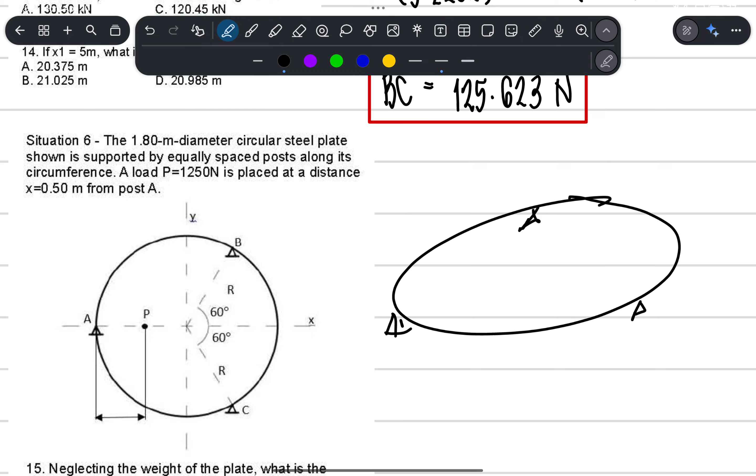Looking at it from the front view, that is the 1.8 diameter. This is 1.8. Then there is a support here, this is RA. Then here is RB. Then here is RC. Then point P is here, at a distance of 0.5 from reference.

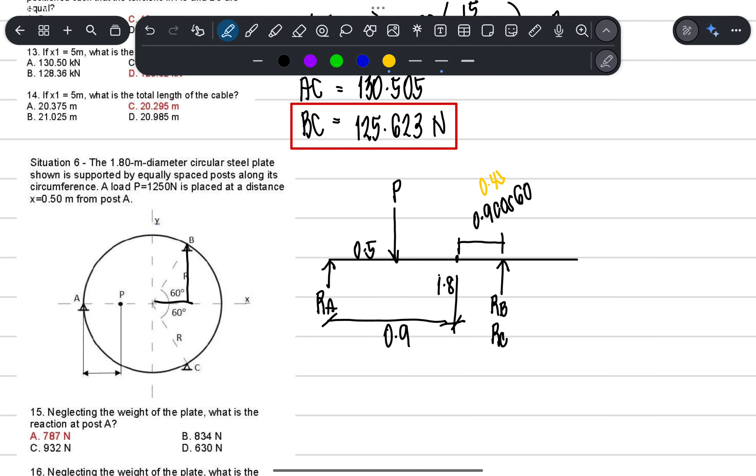What is the reaction at A? We can take moments about the line through B and C so that the reactions at B and C vanish. So, summation of moment at B and C equals 0.

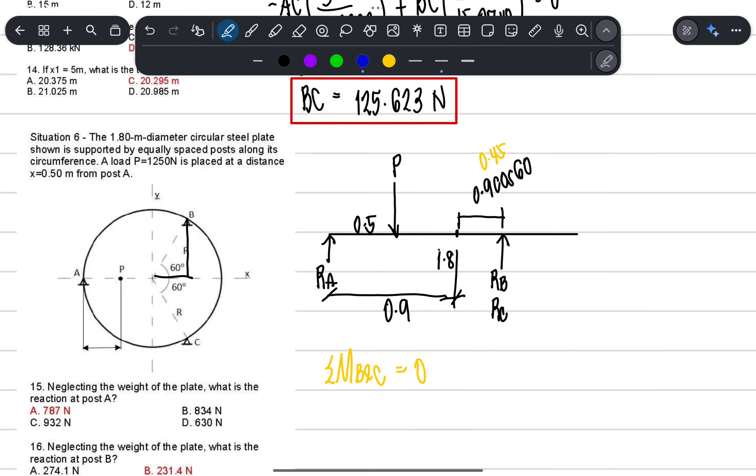That is equal to RA times its moment arm, which is 0.9 plus 0.45, minus P times its moment arm, 0.45 plus 0.4 equals 0. The 0.4 comes from 0.9 minus 0.5.

Substitute the value of P, which is 1250. So, RA equals 1250 multiplied by 0.85, divided by 0.45 plus 0.9, which gives 787.037 Newtons.

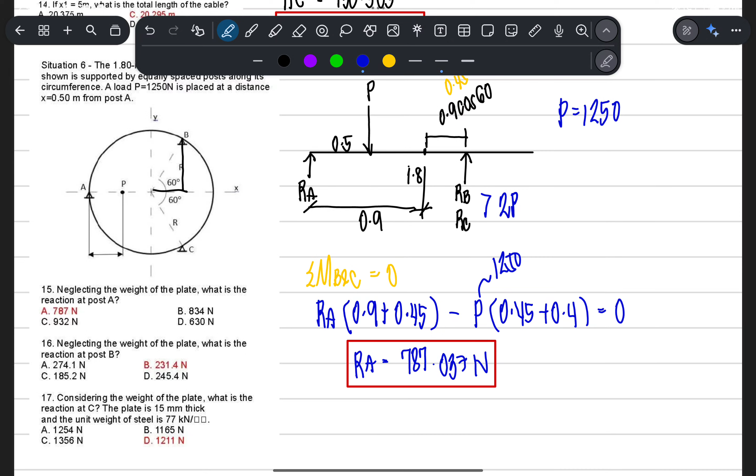Neglecting the weight of the plate, what is the reaction at B? RB and RC are equal since they carry the same load, so we multiply the reaction by 2: 2RB. Using summation of vertical forces, RA plus 2RB equals P, which is 1250.

So, substitute the value of RA: RB equals 1250 minus RA, divided by 2, which gives 231.481 Newtons.

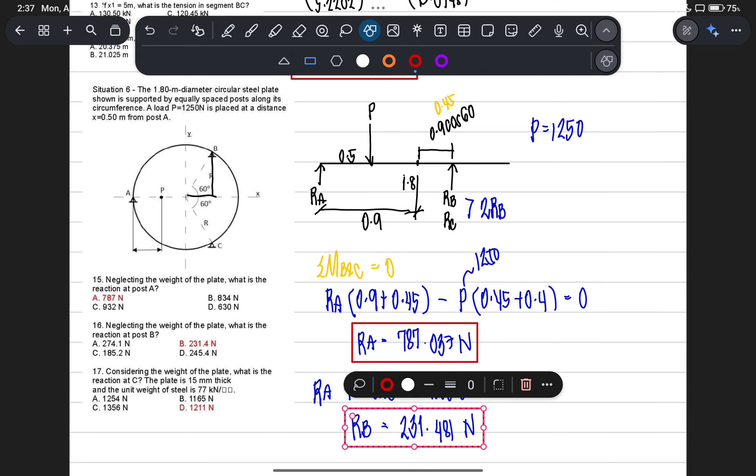Considering the weight of the plate, what is the reaction at C? First, let's get the weight of the plate, since it acts at the center of the plate. This is W.

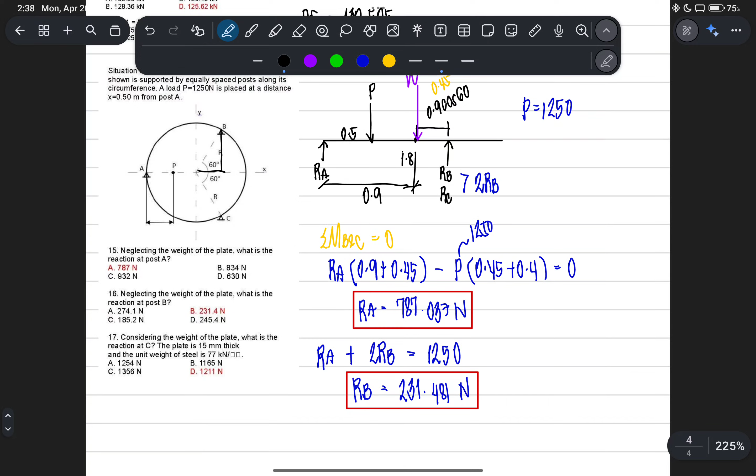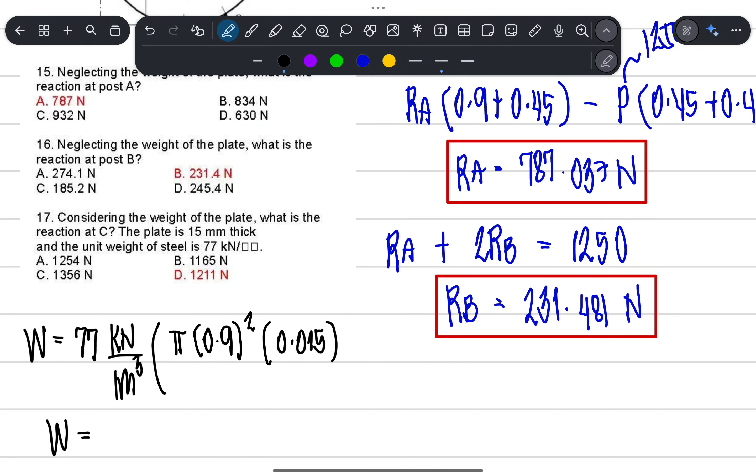The unit weight is 77 kilonewtons per cubic meter, multiplied by the volume of the plate, which is the area, pi r squared, times the thickness. The thickness given is 15 millimeters, or 0.015. So the total weight is 77 times pi times 0.9 squared times 0.015.

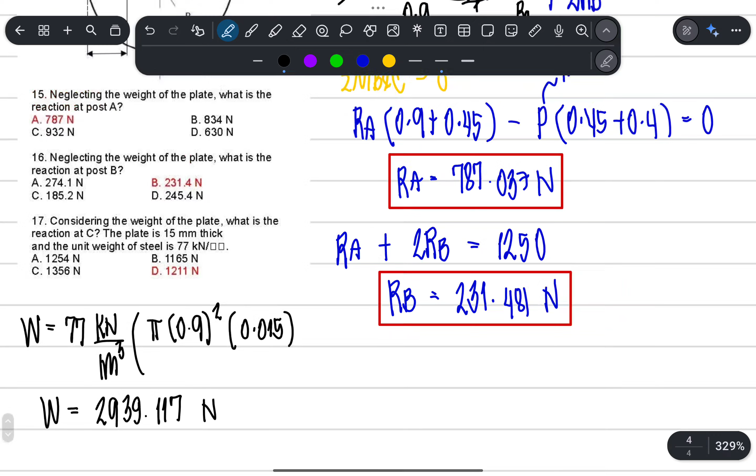To convert to Newtons, multiply by 1000, giving a total weight of 2939.117 Newtons. Then, to solve for RC, we take summation of moment at A equals 0.

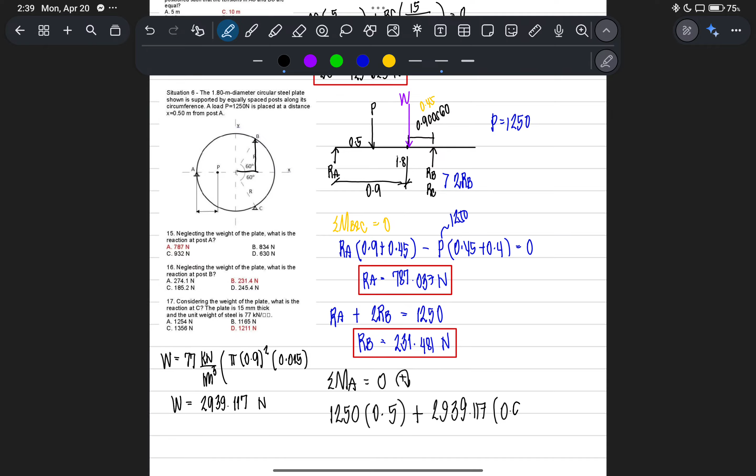Taking clockwise as positive, we have P, which is 1250 Newtons, multiplied by its moment arm of 0.5, plus W, 2939.117 times 0.9, minus 2RC, since there are two of them, with moment arm 0.9 plus 0.45, equals 0.

So, 1250 times 0.5 plus 2939.117 times 0.9, minus 2RC times 0.9 plus 0.45, equals 0. The answer is 1211.187.

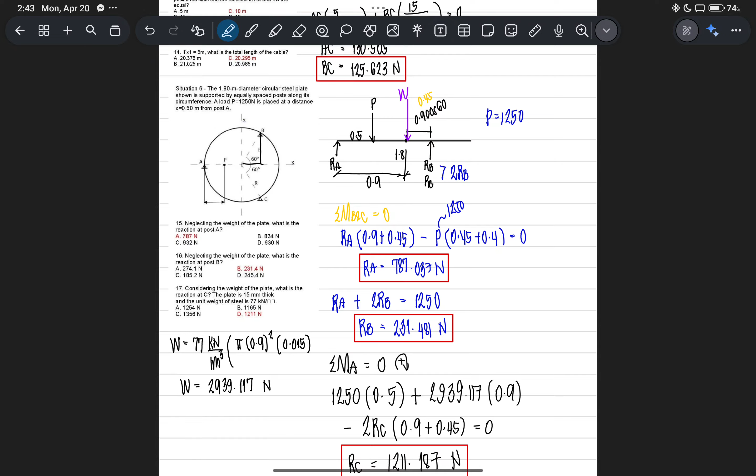Ang gulo. Okay, next, konti na lang, 13 na lang. Yung 13 naman, paulit-ulit naman yung tanong na yan.

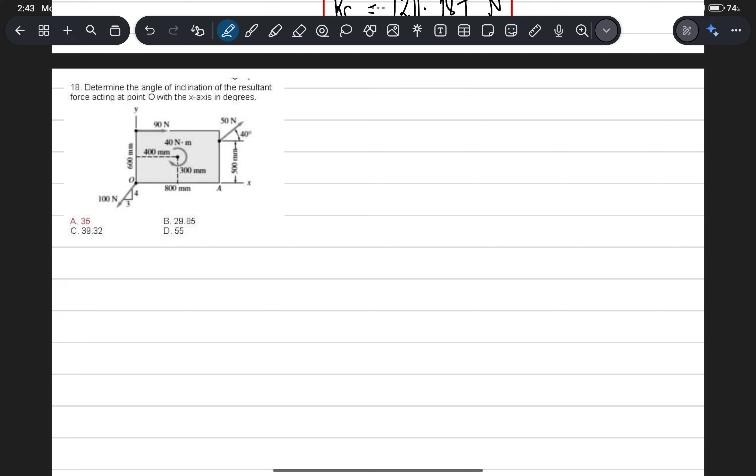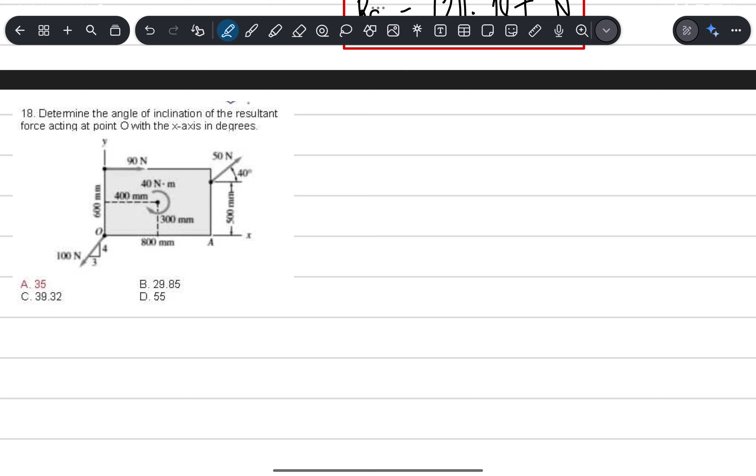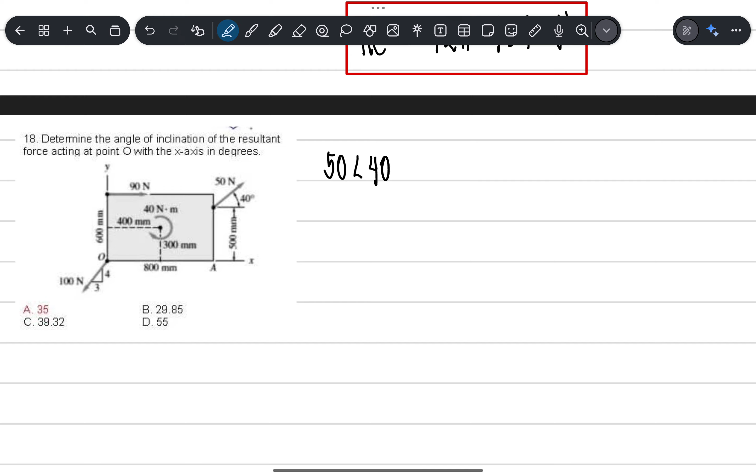Determine the angle of inclination of the resultant of forces acting at O with the reference x-axis. Pakitry nga kung kaya to sa complex mode. So that is equal to, unahin natin si 50 angle 40 plus 90 angle 0 plus 100, and then ang angle natin na gagawin is arctangent, kunin mo natin yung angle nito.

This is theta. Sorry, kunin mo natin theta. So that is arctan of opposite over TOA, 4/3. So magkano yung theta? That is equal to 4/3, which is 53.13. So ang lalagay natin dito is 180 plus 53.13.

So magkano yung R angle theta resultant? Mode 2, complex mode, no? 50 angle 40 plus 90 angle 0 plus 100 angle of 180 plus 53.13.

And then, ups, convert natin. So, that is 83.401 angle negative 35.02. So, ibig sabihin, ang theta natin from the horizontal is...

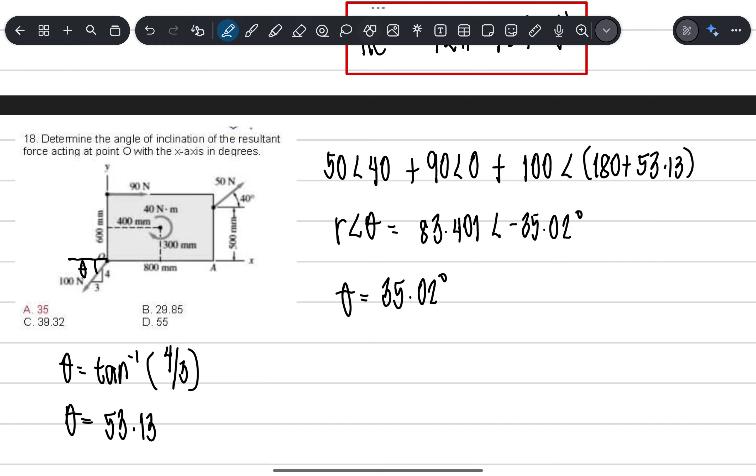Okay, hindi yung kailangan kunin yung ano niyan, yung resultant ng matagal, magmo-moment. Di na magmo-moment dyan, no? Kasi nahanap lang naman is the angle of the resultant. Kasi yung resultant dyan si Rx and Ry. Tapos, ito yung angle theta.

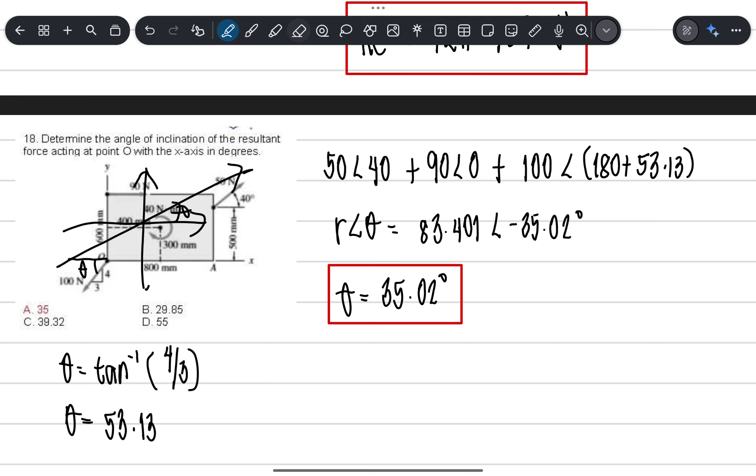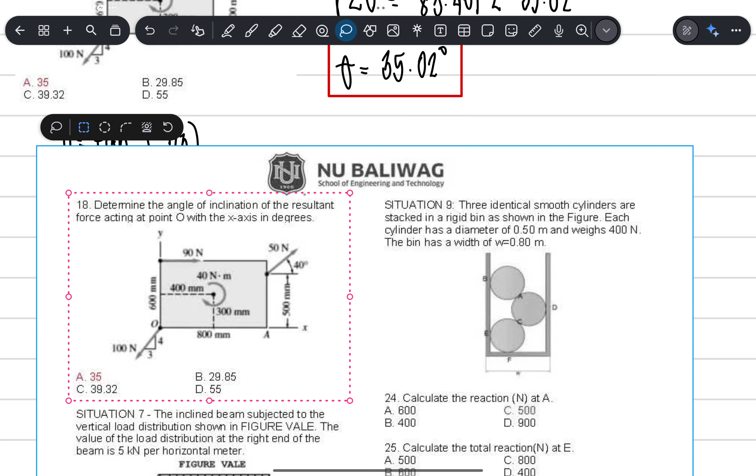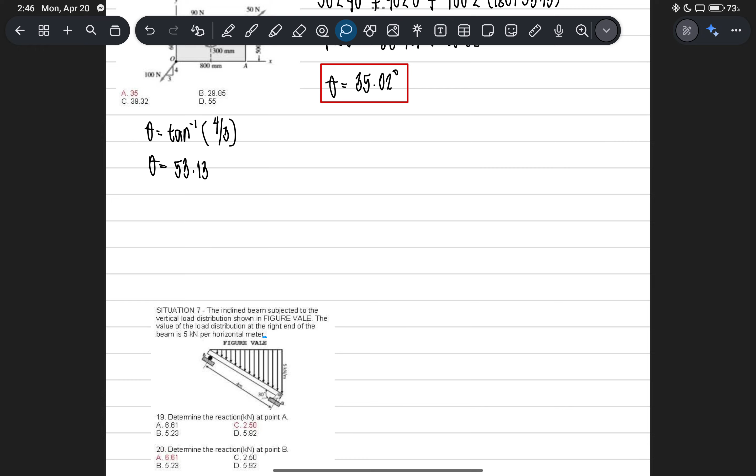Ito, ang dami pa rin nagkamali dito. Or, ang dami kasing bago din. Maraming mga bago. Ang dami nagkamali sa problem na to. Sabi nila, paulit-ulit na nga lang yung tanong mo na yan, sir.

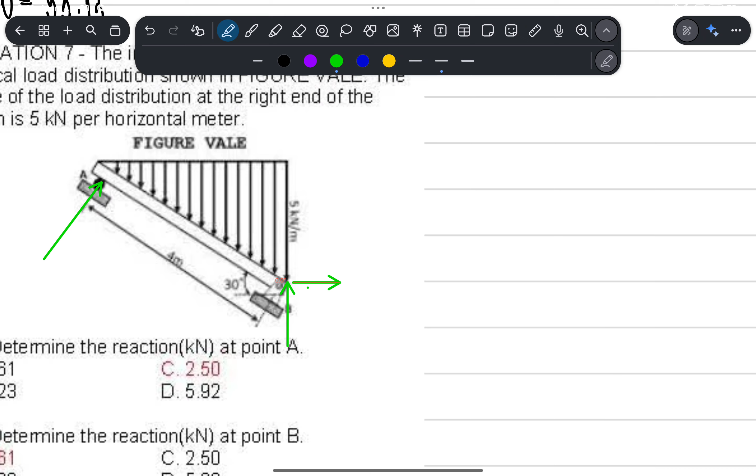Resultant. Rollers, diba? Hinge. So, we have AY, AX. May klase pa kaya? And then this is RA. Joke lang, letter B pala to. BX, BY.

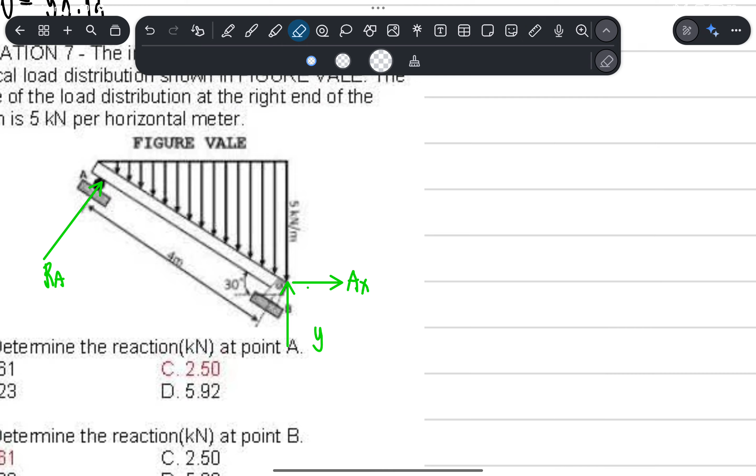Kala ko mabilis lang to. Tapos, yung resultant nito, di ba, nandito lang yan. So, sabi, yung resultant nasa centroid lang. So, ito, ano kaya yung distance natin dito? So, given 30, this is also 30. So, ito, this is 4 cosine of 30. Yung distance lang niya, ha? So, ang moment arm niyan is yung 1/3.

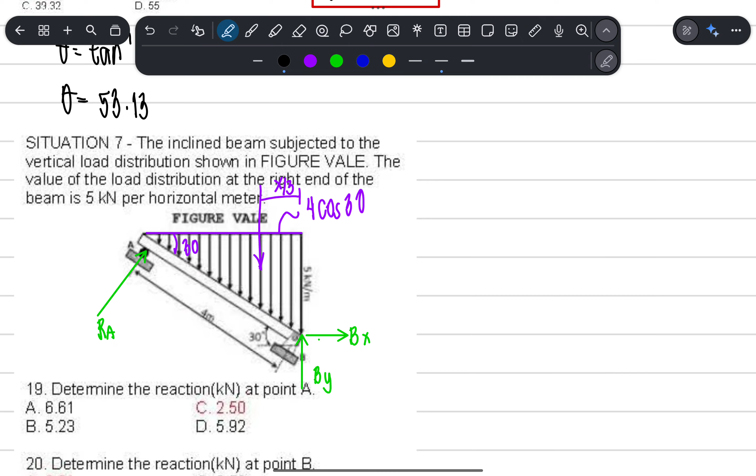Tama? X/3. So, ang gawin natin, mag-moment tayo sa B. Summation ng moment at B is equal to 0. Taking clockwise, positive. So, we have RA multiplied by 4. Kasi perpendicular na siya, di ba?

Minus yung resultant. Ang resultant nito is yung area. Tama? Yung area ng triangle. O, ito na yung height. Ito na yung base. So, that is equal to... joke, 1/2 pala muna, times 4 cosine of 30. O, ito yung resultant. Ang moment arm niya is 4 cosine of 30 divided by 3.

So, magkano si RA? 0.5 by 5 times 4 cosine of 30 times 4 cosine of 30 over 3. 10 divided by 4, that is equal to 2.5. May pinagtataka ako dyan, may mga na-checkan ako.

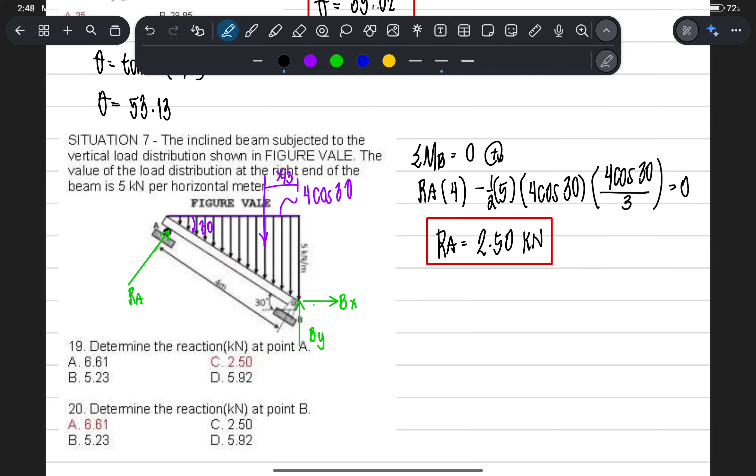Mas bumaba sila sa assessment ngayon. As in, mababa. Anyari? Parang similar naman yun.

Next, pwede na tayo mag-summation ng forces vertical and horizontal. So, ito, yan yung horizontal and vertical. So, ito, this is angle 30. So, summation ng forces horizontal is equal to 0. So, Bx is equal to Rax, diba this is Rax, which is 2.5 cosine, sine of 30. So, 2.5 sine of 30, that is equal to 1.25 kilonewtons.

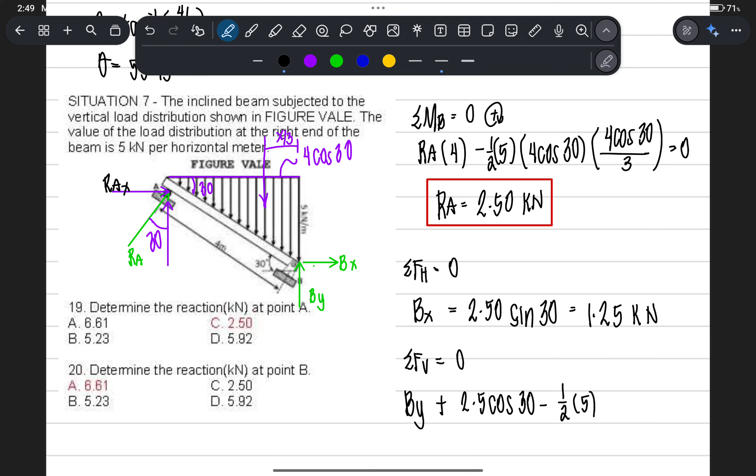Then, for the summation ng forces vertical is equal to 0. We have By plus RA, rather, that is 2.5 cosine of 30 minus the area, that is 1/2 by 5 by 4 cosine of 30 equals to 0. Magkano yung By? So, 0.5 by 5 by 4 cosine of 30.

6.495. Basta yun na. Sulat namin. Nasolve naman natin si Bx and By. Wait lang, sayang yung record. Mapuputol. 2 seconds lang lalagay ko.